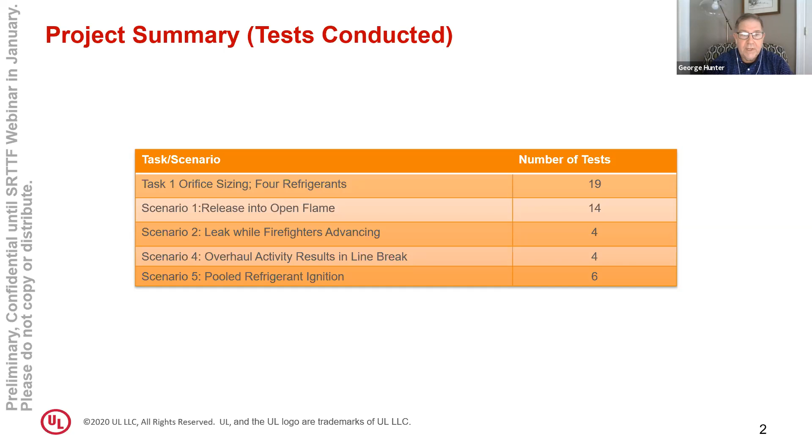What will happen? I'll go through this quickly. What we wanted to do was have a 50 grams per second release rate. We tried 2 methods. One was what we called constant pressure, where we had a refrigerant tank filled almost 80%, so that as we're discharging, it's all liquid.

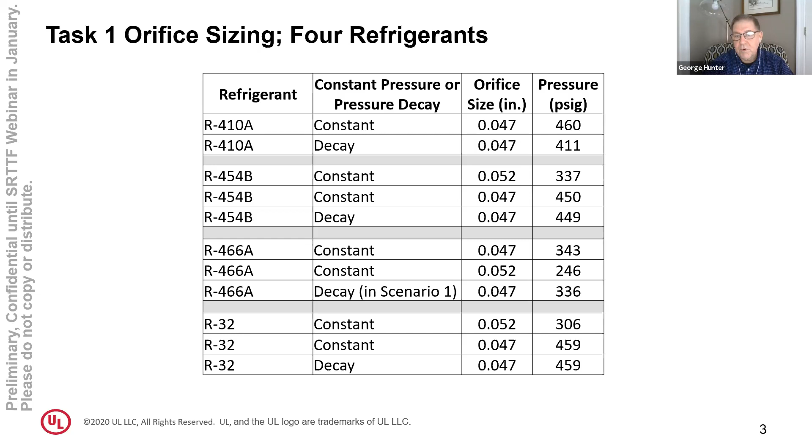The ones we call decay, we filled in either 15, 16, 20 pounds, such that about a minute and a half to 2 minutes into that release, it transitions into 2-phase flow - so you have both vapor and liquid coming out of the orifice. We determined orifice sizes and pressure ranges needed to achieve that initial 50 grams per second.

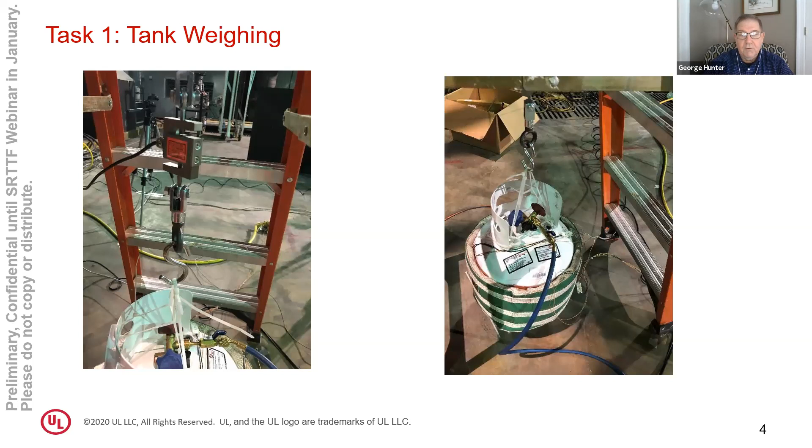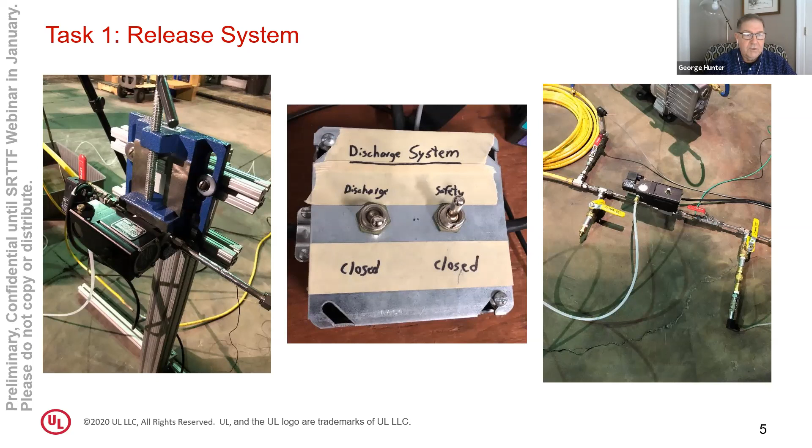This switch that you see in the center is in a control room so that our operators were isolated from any potential adverse effects of being in the test room.

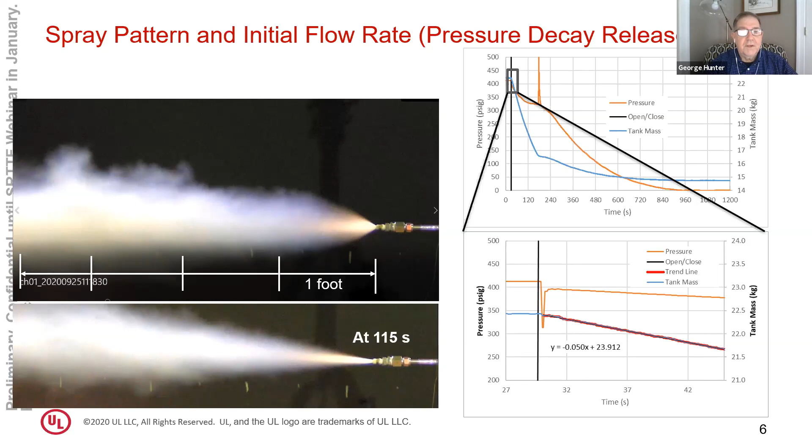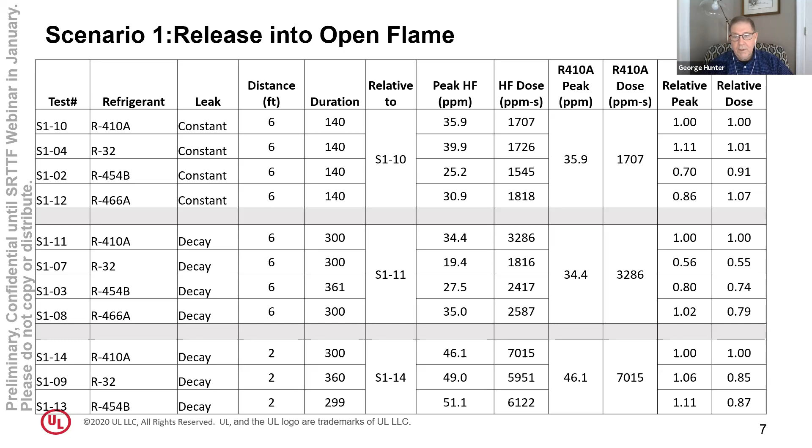But then the last 2 columns take a look at what is that peak of A2Ls, which is R32 and R454B. In some cases they're lower, slightly higher. As far as the relative dose, which really should be the average across the entire 140-second discharge, they're very close - there's not much difference in the concentration of hydrogen fluoride. The same pattern is true at the decay rate at 6 feet, and also the decay rate at 2 feet distance.

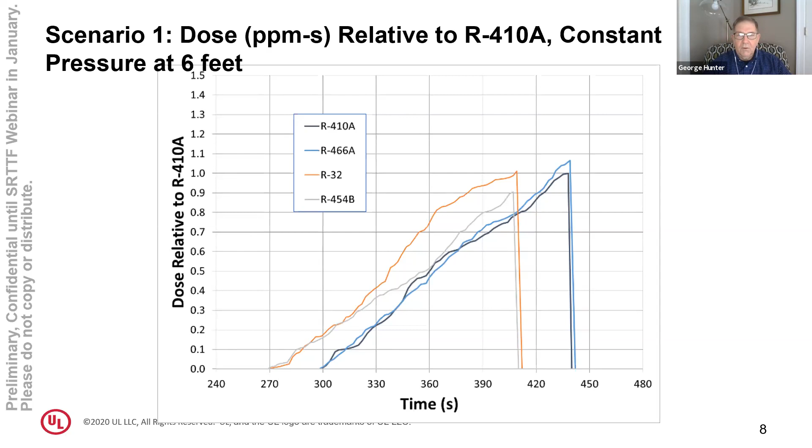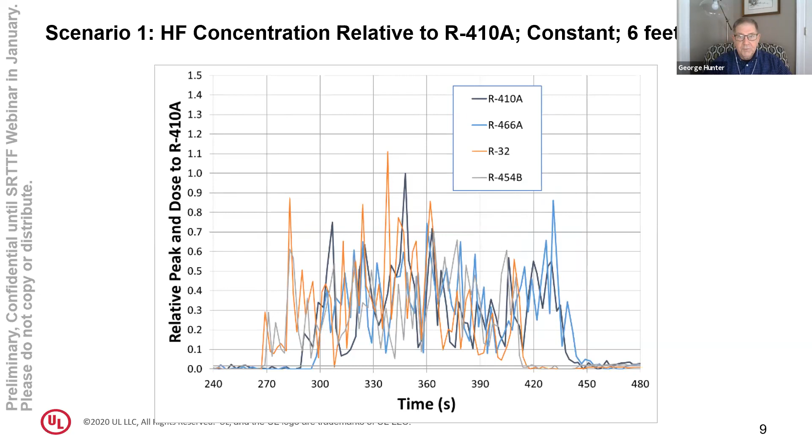We're also measuring heat release while this test is going on. We did not see that this was acting as an extinguishing agent. There was actually a slight increase in the 120 kilowatt fire, not significant, but it was there. The effect of this is this discharge stream was cool gas.

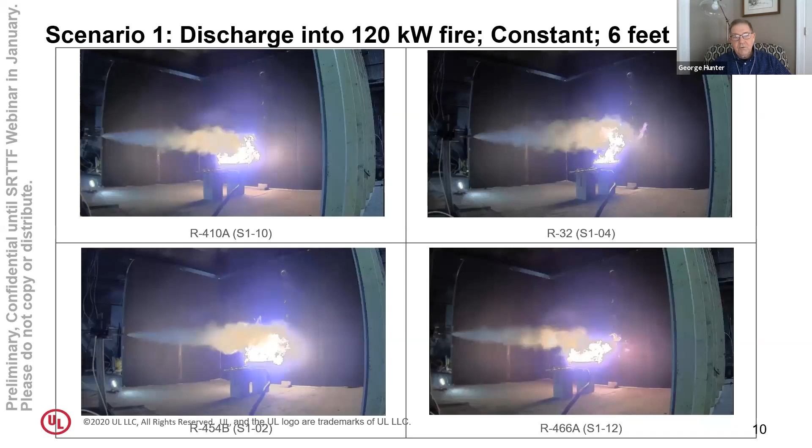Stuff on my screen is getting in the way. So on the lower left is R454B, and on the lower right is R466A. It looks a little different because it's a much denser gas than the other three. But in any case, this is the only effects we saw. It tended to knock down the visible appearance of the flame, but did not increase the fire size that much.

This is taking a look now at what we did at 2 feet. We were not able to run R466A because our smoke abatement system wasn't able to scrub elemental iodine from our exhaust stack. So if we do additional testing, we're going to have to figure out how to solve the iodine problem, which is a component in R466A.

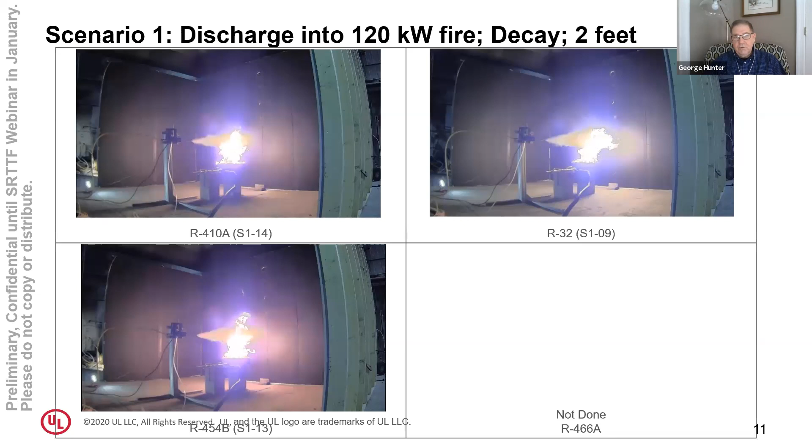But you can see there isn't much difference in behavior. The discharge actually shoots through the flame. It knocks down its visible appearance, but doesn't really change or decrease the heat release rate. It actually does increase a slight amount. So these are some of the observations we have.

There's more being developed as I keep working on the report, but this is preliminary results. The discharge at 6 feet with a pressure decay produced more total hydrogen fluoride than releases at constant pressure. That most likely has to do with that period when the discharge rate drops down to less than 20 grams per second, and there's more dwell time of that discharge in the sand burner fire.

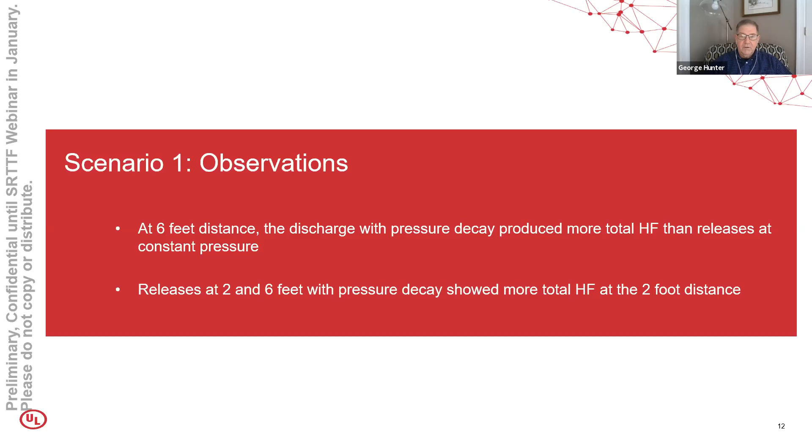Both releases at 2 and 6 feet with pressure decay showed more total hydrogen fluoride generation at the 2-foot distance. So we know there was some combustion, some breakdown of the refrigerants, but it just did not result in a visible flame. It wasn't going to look like a flamethrower.

Our scenario 2 was to look at much more of a situation that firefighters might encounter. There's a fire in a room, there's a hallway leading down to it, and they're about ready to begin their attack. We wanted to look at what conditions they're facing. I'm looking here at peak room center temperatures with the different refrigerants, and a baseline test where we didn't release any refrigerant at all.

The temperatures are all above 800 C. And by the way, the melting point of aluminum is 660 C. I have some photos later on that show we definitely melted aluminum components in the air handler. At the door out of the fire room into the hallway, again, we had temperatures close to 900 C.

In the hallway, there was little mixing with fresh air, so the temperatures were slightly lower, but in the range of 680 to 840. The baseline actually gave us the highest temperature there. The peak at the air handler - we did add some thermocouples to the air handler and attached to the aluminum. You can see that those all exceeded the melting point of aluminum.

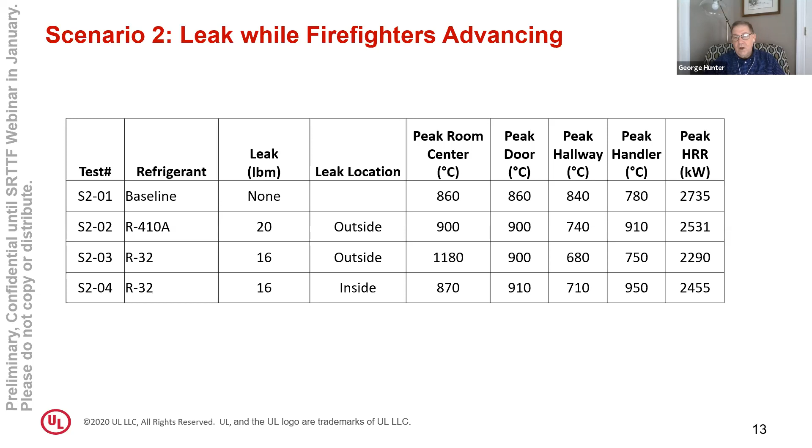Finally is the peak heat release rate in kilowatts. This was more to demonstrate that it was an actual ventilation limited fire. There was plenty of fuel to burn, and in a free burn that we did before we ever started this test series, the same fuel package produced 6,500 kilowatts. So we know that this fire was starved for oxygen, with very little oxygen at the ceiling level.

So this is now looking at a graph of the 4 different fire sizes, shown as a messy graph indicating there's not much difference between the baseline and the 3 refrigerants that we tested. The black line that extends more to the right was our baseline test, and we used that to determine when we actually want to release the refrigerant.

So we started recording and took idle data, or no fire data, for 5 minutes, and then we started the fire and found when it got up to its ventilation limited conditions. We decided that was about 6 or 7 minutes after we started the fire, when it had grown to its maximum size, and that's when we decided to release the refrigerant.

So what we have done is release refrigerant outside the unit with R410A and R32, and inside the unit with R32. We don't see much difference in the heat release rates. That dotted line square is when we actually had the release valve open.

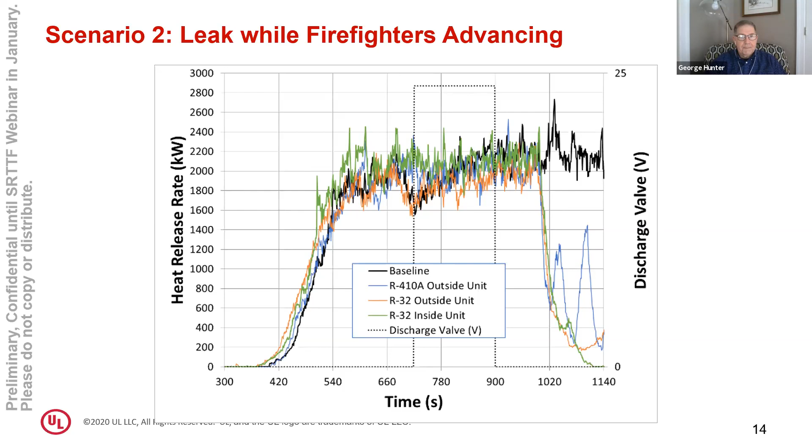So here's a picture of the A coil within the air handler and some locations where we had thermocouples attached, just so we can see what happens with those temperatures.

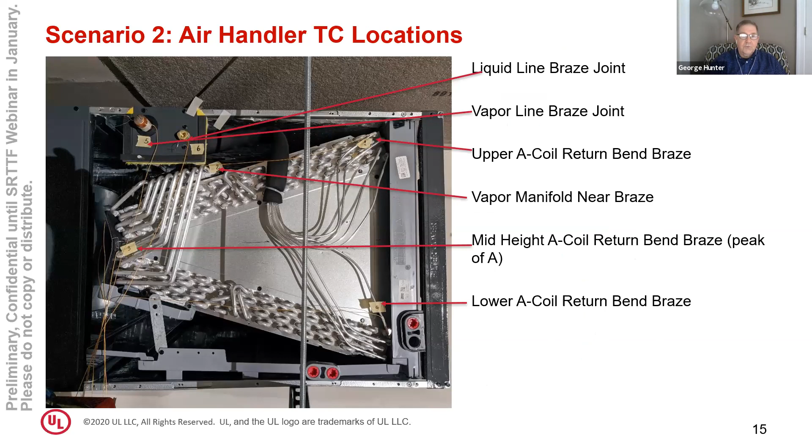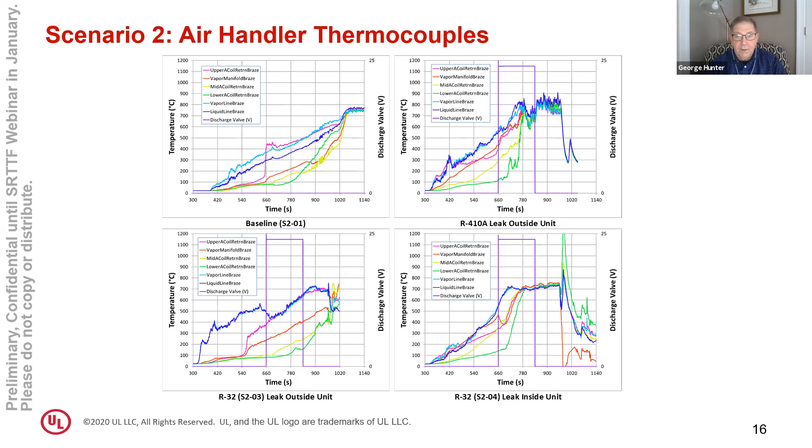In the lower left-hand panel was an R32 discharge, and finally we did a second test with R32, which was inside the unit. And again, we're getting over 700 C.

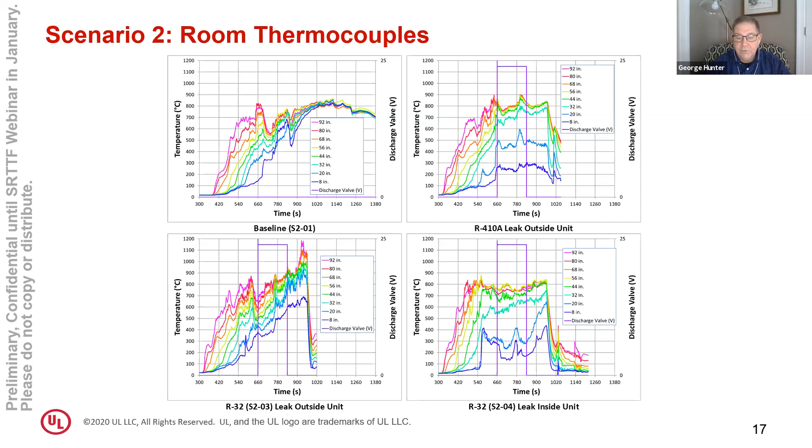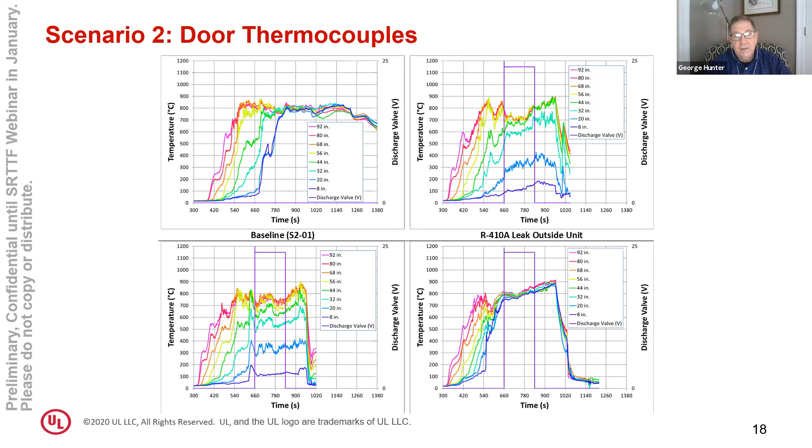The other two, I'm not quite sure why, but it does make sense that with the fresh air coming in low in the room, those would stay cool. It's possible with the upper left and the lower right that we simply had flashover conditions in the room, and it was raising the temperature of everything.

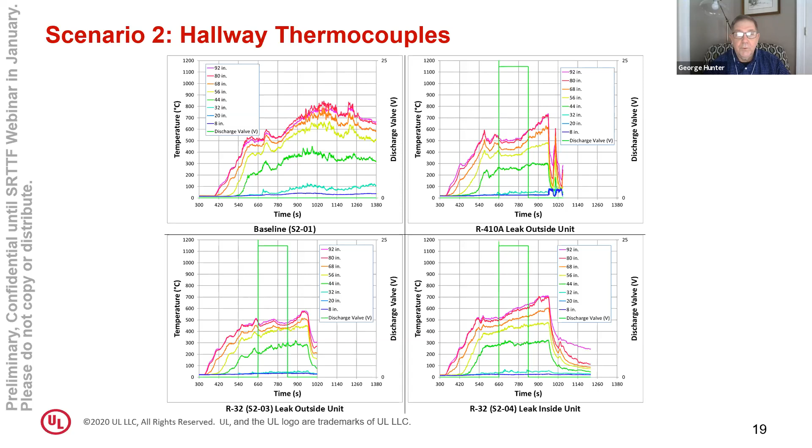The hallway thermocouples were naturally cooler because there's fresh air coming in at the low level, and these lower blue lines show that temperatures stayed pretty low while the hot gases were coming out high. We still had about 300 C at the 44-inch level. Below that, at the 20-inch level, we were less than 100 C, and that was generally the case in all of those tests.

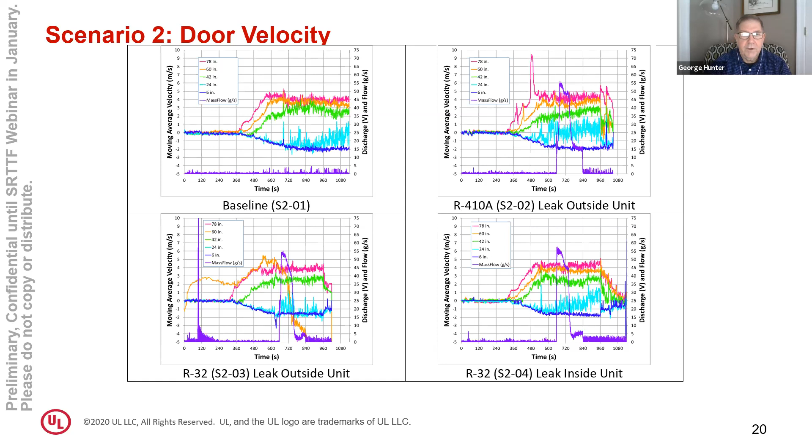We actually measured the door velocity with a set of 5 bidirectional probes and thermocouples. In every case, there's hot gases coming out of the door and cool gases coming in at the lower level. Those probes were at 6 inches above the floor and 24 inches above the floor, so the hot gas layer was somewhere between 24 and 42 inches, probably more like 30 inches in that range.

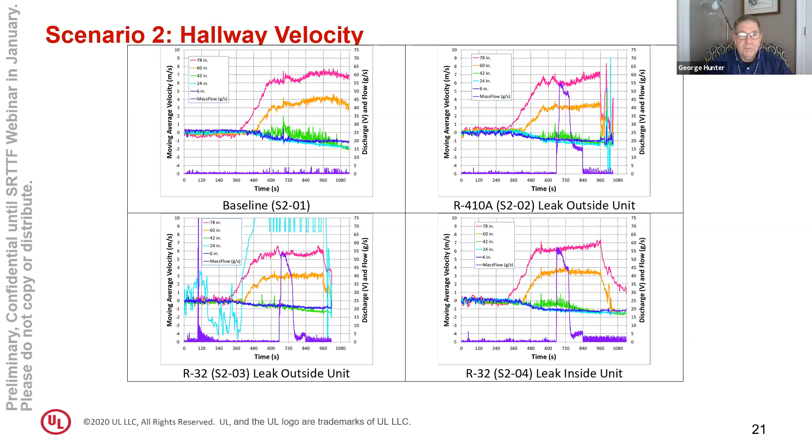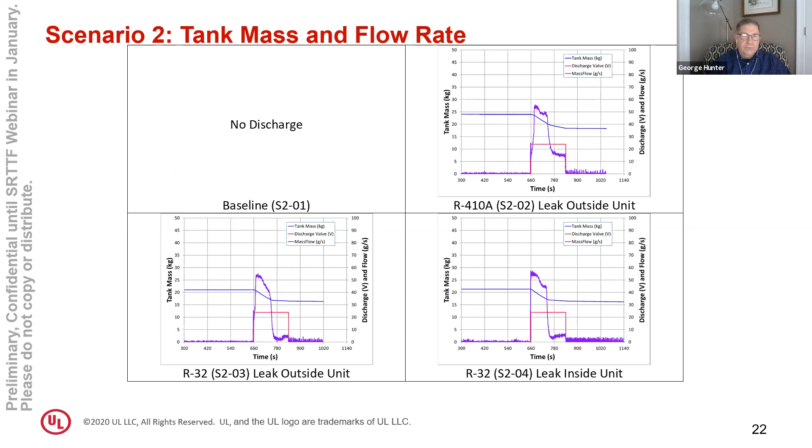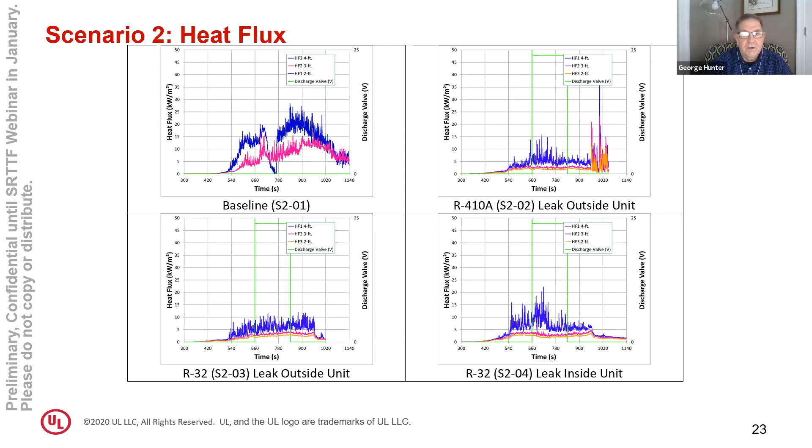And generally, I would say the average is less than about 8 kilowatts per square meter at the 4-foot level in the hallway. So again, we're assuming firefighters are crouched, preparing to attack down that hallway.

So here's some typical photos before the test. Those cardboard boxes are a commodity classification box that we use in sprinkler testing. We have constant heat release characteristics. And so when we burn these in a free burn, we had 6,500 kilowatts.

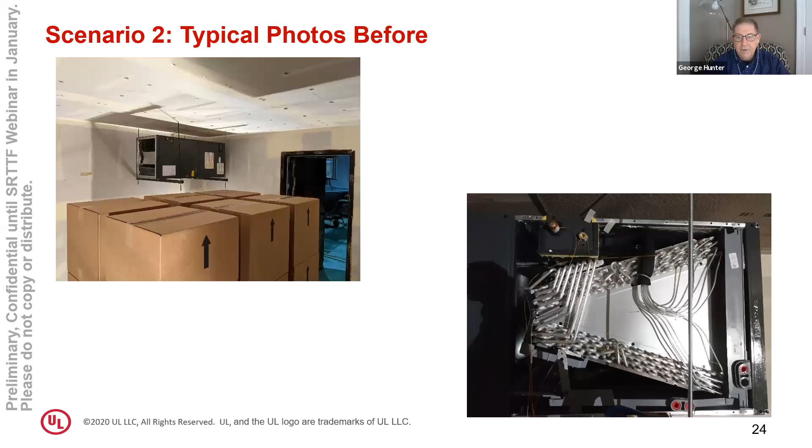Again, there's a picture of the air handler A coil. And here's some pictures after the fire. We supported this unit as a ceiling installation. And you can see that the A coil has translated.

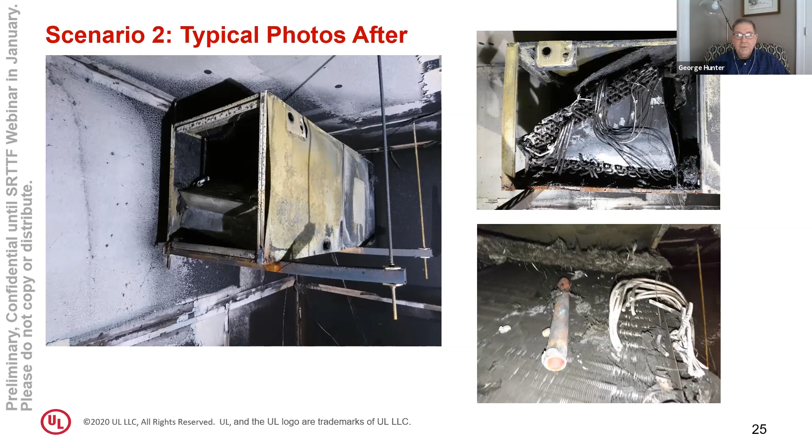The unistrut bars that we use to support it have actually bent from the weight and the temperature in the fire. The lower right-hand corner shows a copper tube that is the vapor return that has completely separated from the aluminum tubes that were feeding into that. So the temperatures were high enough to melt that joint, and there's plenty of damage. Even some of the U-bends on the A coil were melted, in some cases completely gone.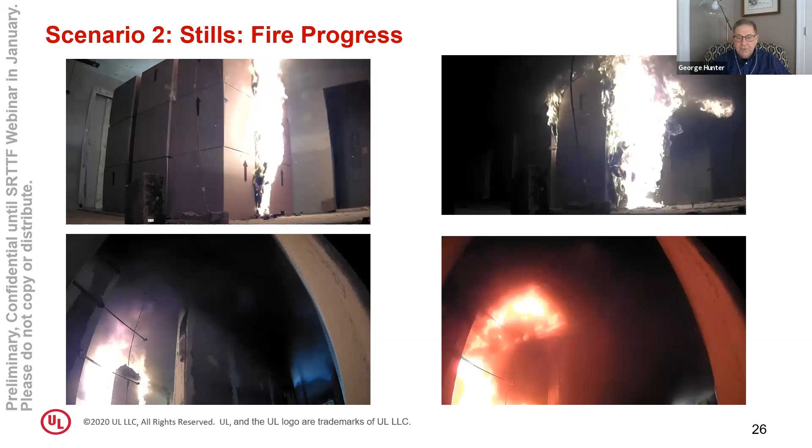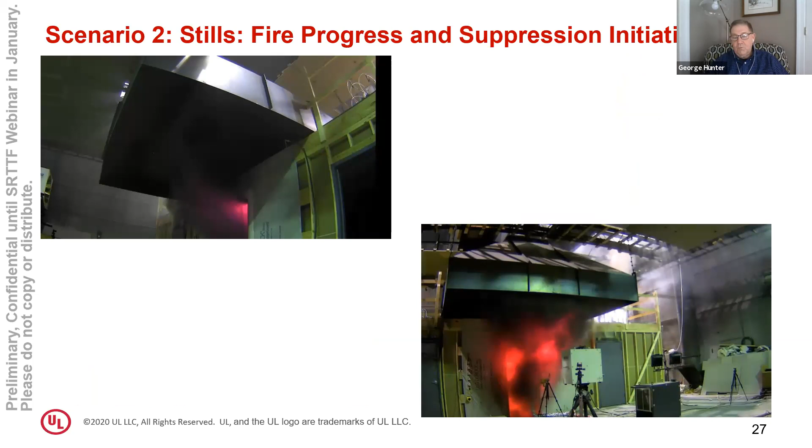As it progresses, it comes out of the hallway and into our collection hood. And finally, this lower right hand is when we actually started a sprinkler in that test room, and it was pushing all of those hot gases down the hallway just due to the flashing of water into steam and pushing everything out of the room.

So we really didn't see any significant difference in heat release or smoke or temperatures based on the leak location. There was no significant difference in the heat release rate. The heat flux was higher in the baseline test than the other three. And then the temperatures at the air handler were sufficient to melt parts of the A coil.

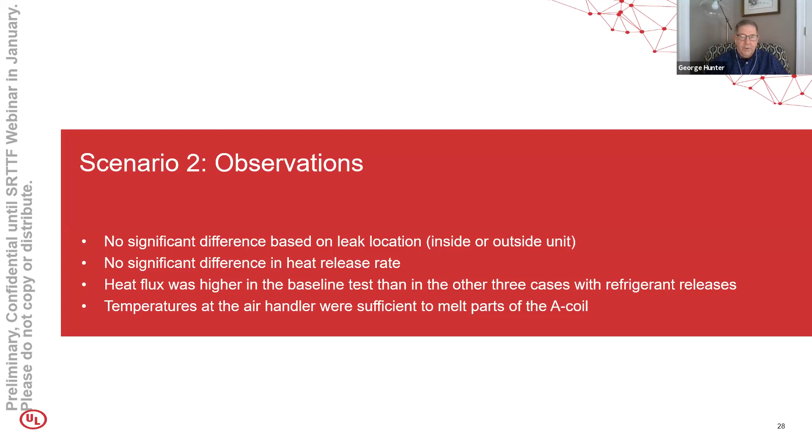So going on to our overhaul activity, scenario 4, we had the first scenario where we were just spraying refrigerant into an existing fire. Probably didn't look anything like an overhaul condition. So in this case, we were trying to simulate a line break in the refrigerant lines that occurs during an overhaul.

So what we have here is we have a 5-foot little wall in the lower left-hand corner here, and that leak location, the little red star, was pointed down to the corner of that area where it would bounce and cycle around to a sand burner that we had operating at 40 kilowatts. And then there was a 1-foot gap in that for the gases to come out.

We also had right outside of that gap, we had a measurement of heat flux. And in other places, we were looking for any indications of a room pressure rise, a boom or a bang or anything like that. We also were measuring the ventilation flows, and we also collected hydrogen fluoride through a solvent method where we're sipping the air that's coming out of this and then measuring the concentrations and then back calculating that to say what was the average concentration of hydrogen fluoride in the air.

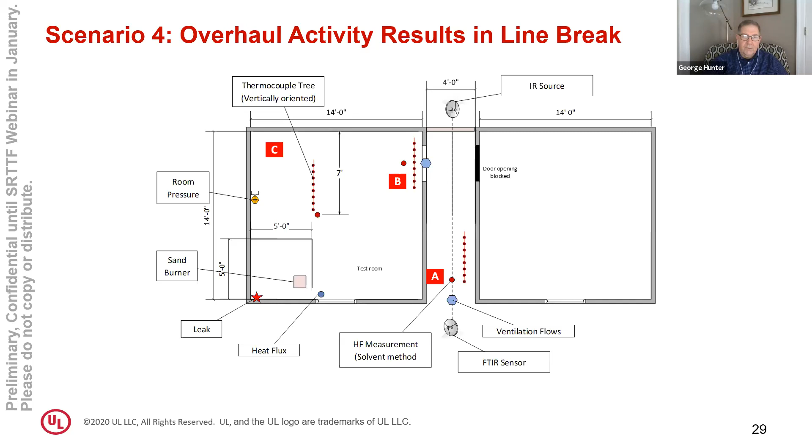So again, I've still got this relative dose, but I need to divide that by the time, which I don't have on here. And anyway, you can see that the peaks for all of these refrigerants in these scenarios was about the same. So it didn't matter whether it was an A1 refrigerant or an A2L. They all had about the same average peak.

And as far as relative averages, in the very last column, you can see that they were all within 2% of what would come from R410A. The peak in R32 was about 18% higher.

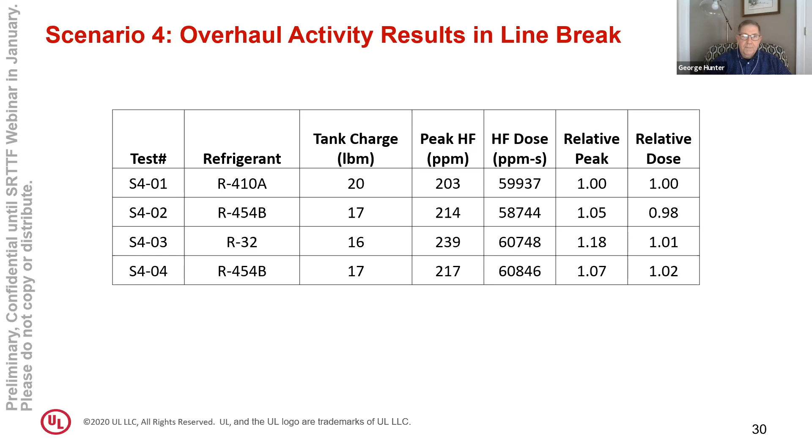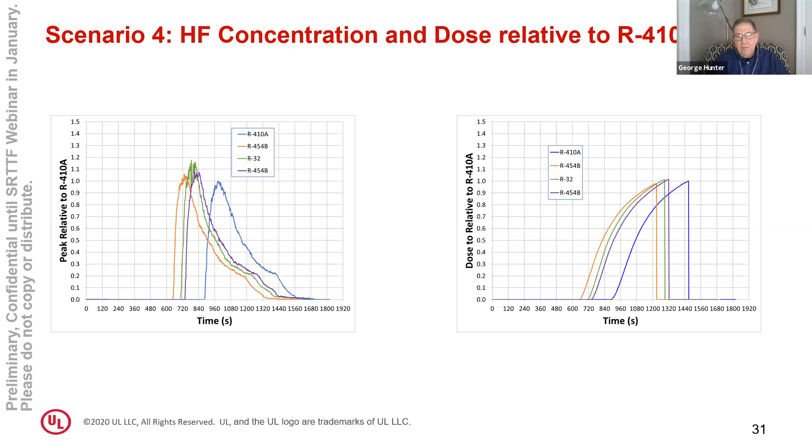So on the left is looking at these relative peaks. In this case, the R410A peaks right at 1, which is the blue line, and the others are slightly higher than that. Again, this average dose shows that they all climbed up to about the same levels as R410A.

And then I'm showing the same thing as far as the mass release. Obviously, the most hydrogen fluoride generation occurred when we were releasing it the fastest at 60 grams per second. But overall, the climb to the overall average was steepest first, but eventually came out to the same level.

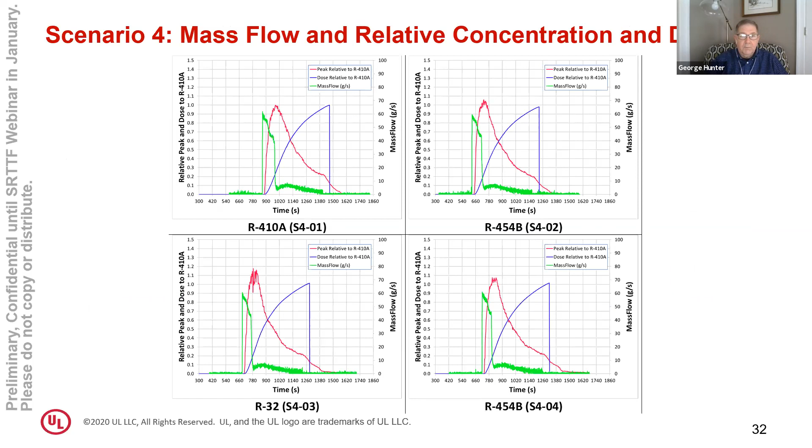We did notice some change in heat release as we were doing the discharge. Again, it was very slight. Our baseline test before we started release was 40 kilowatts, which is at the low end of our calorimeter.

So our relative error at this low end is high, because we're capable of measuring 5,000 kilowatts, and we're talking about 40 kilowatts. So our relative error is around 62%. It's about the best that we can do at this low end of the range.

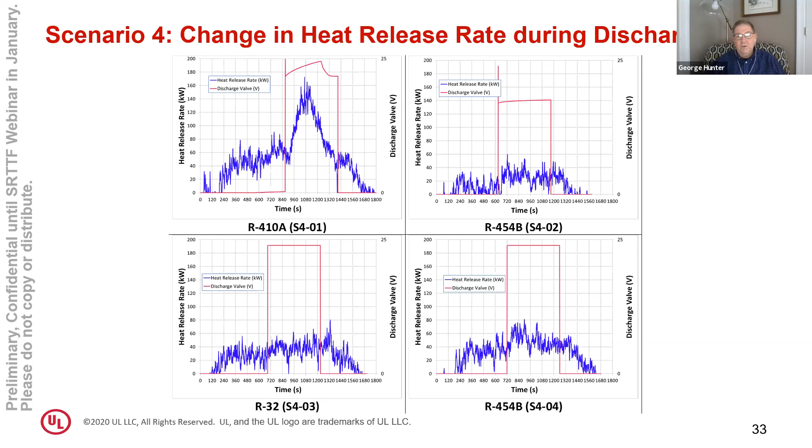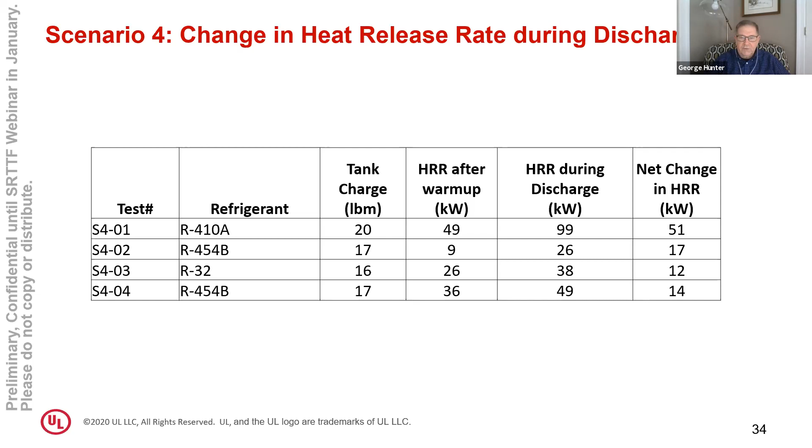As far as the change in heat release rate, that last column shows, if you discount the R410A first row, it was somewhere between 12 and 17 kilowatts additional above the 40 kilowatt fire. A good sized home gas log fireplace is about 25 kilowatts, so we're talking about maybe 2 or 3 sizes of that. It's still a pretty small fire.

Now these are some graphs of what the arrangement looked like. We had heat flux gauges in the upper right hand corner, right outside that opening in this little knee wall. It was 3 feet tall and 5 feet wide, except for the gap on the side where those gases could swirl and exit. In the lower right hand side, you can see those same 3 heat flux gauges right next to the outflow or the gap, so the sand burner is in that same area.

We also had a hydrogen fluoride sample probe in the center of the room, and a thermocouple tree. Going back to the upper right hand side, our discharge port was about 1 foot from the wall at the 4-foot elevation, and it was angled down to impact the corner of this little 5-foot wall, so the intention was to knock off the speed so there'd be greater dwell time in that flame.

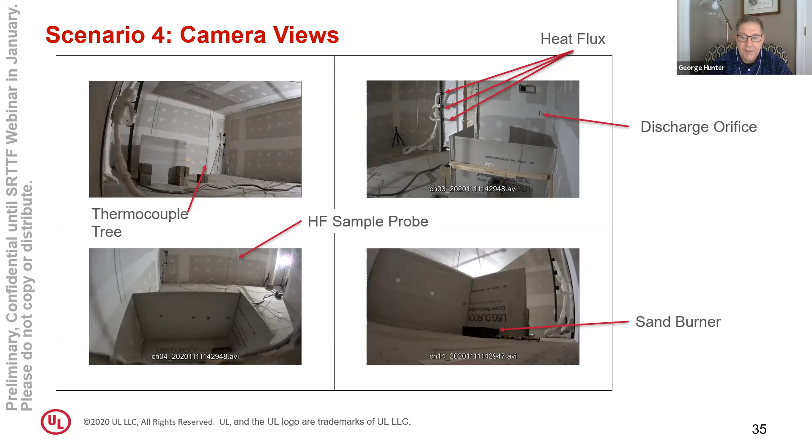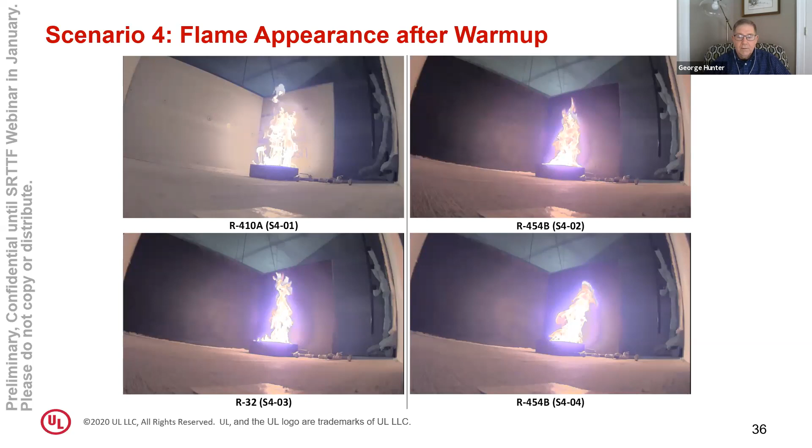Again, this is taking a look at what the flame looked like after we let it percolate for a while. This is 40 kilowatts, it's kind of going straight up. Then after we start the discharge, you can see that the flame is very much disturbed. Not much change in the actual heat release rate, but the visible heat release rate obviously went down.

You'll notice that we changed the background from the white Durock board and painted it black so we could see some of the mist of the refrigerant being discharged. So you see that in the 2 or 3 panels that have a black background.

In the R32 case, lower left hand, even though that looks like it might be some R32, if you see the whole video, it's really just the propane flame being disturbed by this discharge. We didn't see any visible sign that there was any ignition of this refrigerant at the sand burner.

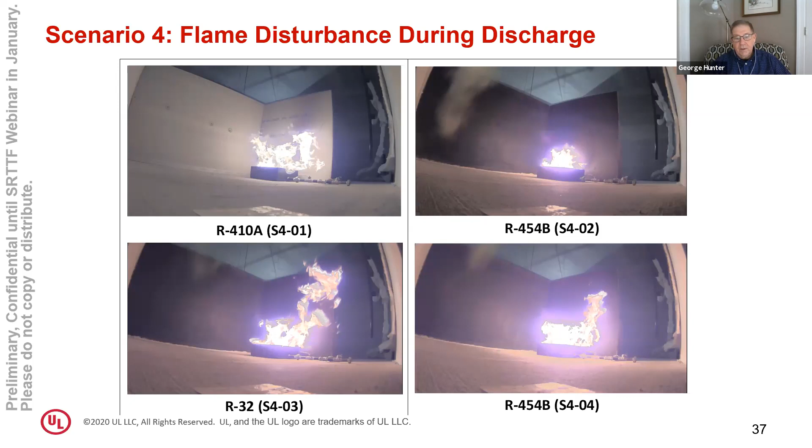So overall, in scenario 4, the production in the hallway was much larger than what we measured in scenario 1. But again, they're not really comparable, because in scenario 1, our exhaust hood was directly over the fire, so everything that was produced went straight up, where in scenario 4, all the gases had to traverse that hallway.

So they were in the beam of the IR for a much longer period of time, which could itself lead to a higher measure of concentration. We did notice that there was less pushover, I called it, of the burner flame, indicating that we did have a lower velocity of refrigerant through the sand burner. But the change in heat release rate during the discharge was 50 kilowatts maximum, and very likely much lower than that. That was the one exception with R410A.

The heat release rate, and it's a comment that we're operating at the very low end of this calorimeter, but we needed to use this calorimeter because of the scenario 2 test going up to 2,500 kilowatts.

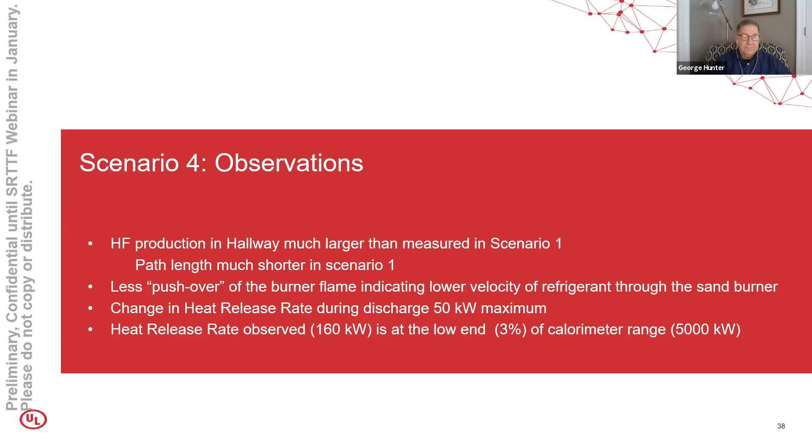The final test that we did is we wanted to look at what happens if we have a pool of refrigerant that's created in the test room. So what we did is we created a diffuser that would knock down the release rate and spread it down low in the room, but then we also blocked half of the height of that hallway door, so that essentially we had a pool for this dense gas to accumulate in. Actually dense and cool, because it comes out around minus 50.

Again, we were looking for room pressure. We also were measuring heat flux. To measure concentration, we're using oxygen sensors right next to it, and also next to the door, because we wanted to make sure that we had fairly uniform concentrations after we finished our discharge of refrigerant. We had an electric match and a heptane cup, which we first started at 6 inches above the floor.

That didn't work out so well because the gas mixture was way above the UFL for the refrigerant, R32, and there was very little oxygen present, probably less than 11%, so that we couldn't even ignite the heptane. It did smolder, but it would not ignite.

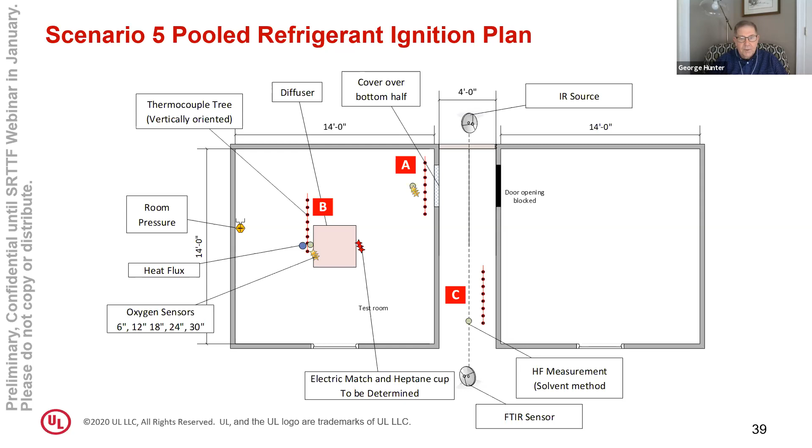So we also had thermocouples, and we had the open path FTIR. So this is a little more about how we did the diffuser.

We took a piece of Durock, 3 feet square, and elevated it 1 inch off the floor with spacers. And then we had an 11-inch hole cut in the center of it. And then we took our sand burner that we had been using to flow propane. This time we decided to flow refrigerant through it and turned it upside down over that hole. So the refrigerant, as in a liquid state, was coming into that sand burner, flashing to vapor, and then dispersing through the room through that small gap at the bottom of that 3-foot square.

We estimated that our discharge velocity was somewhere between maybe a foot to a foot and a half per second, or 0.3 to 0.4 meters per second. So it was pretty slow.

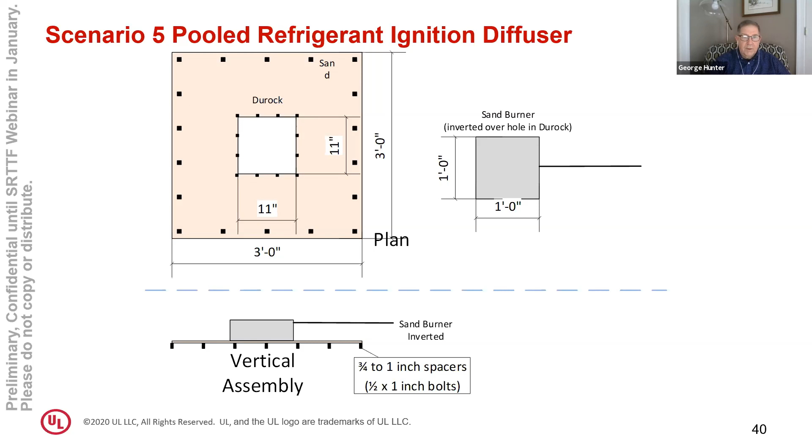And again, this is an overview look at it. You can see that the hallway door is blocked with a piece of drywall. We have our oxygen sensors there and in the center of the room. The diffuser assembly is all there. We also have a stand on the right side.

We have an electric match at the 10-inch level with 30 milliliters of heptane. And at the 2-foot level at that same location, a little plastic cup with 30 milliliters. And then we created our own special candle, which was paper towels and cheesecloth sprayed with a little bit of heptane and then wrapped in plastic just to keep the heptane from evaporating.

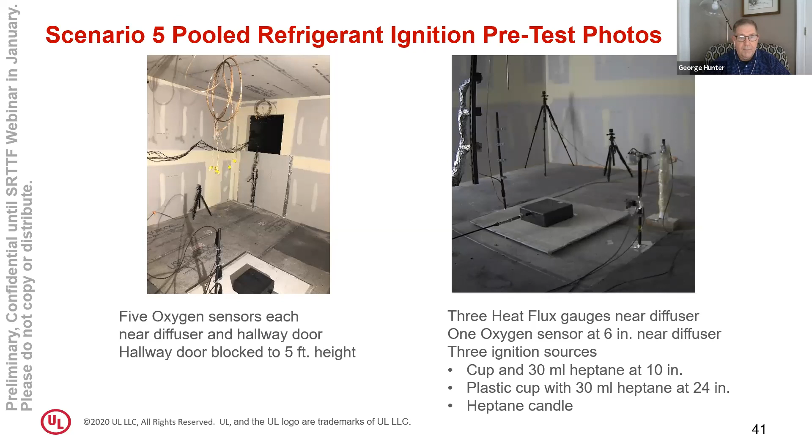So we had cords to actually ignite those matches. We wanted to start with the match at the 10-inch level. So what you're seeing on the left is as we were first assembling the lab, but we did measure concentrations.

So a summary of all the testing we did: one test just to prove that we didn't have any leaks, and we did find that there was a leak, and that was patched so that it wasn't going to be a problem in the next 5 tests.

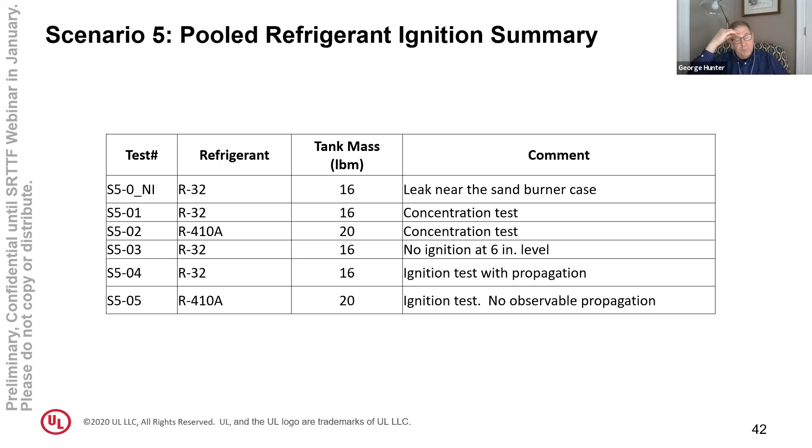So we did a concentration test with R32 and with R410A. And then we tried an ignition test with R32. We're not able to ignite at the 6-inch level. Then another test with R32 where we were able to ignite at the 10-inch level. And then finally another test with R410A. We did not see any observable propagation from that ignition.

So to show you that we have fairly consistent concentrations across the room, the dashed lines are in the center of the room. Or, sorry, I need to make sure I'm reading this graph correctly.

Okay, so I am showing, comparing the first test where we had a leak to the second test with R32 where we did not have that leak. So you can see that dashed line that's above 35% has some squiggles to it, and that was due to the turbulence caused by that leak at the sand burner.

When we repaired that, we went much higher in concentrations at the 6-inch level, way above the UFL, about 29.5% for R32. So we knew we had a very heavy concentration at the floor.

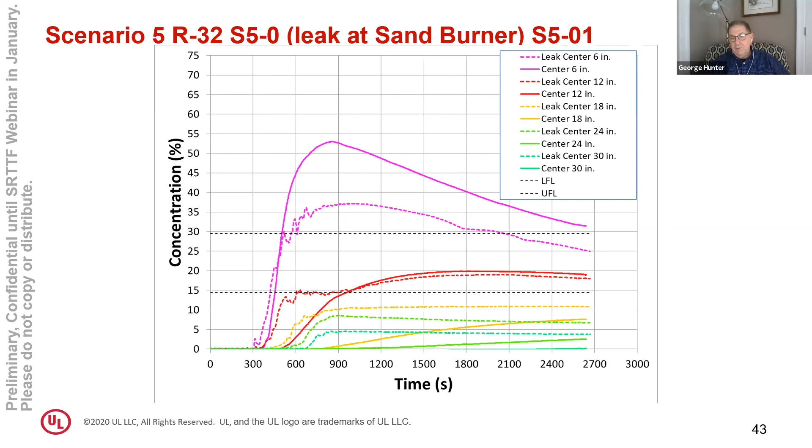And then if you go down one level to 12 inches, you can see that we were right in the middle of the region between the LFL and the UFL. And based on this data, we decided, well, we think we can have an ignition point somewhere between 6 and 12 inches. And that's when we decided to try 6, thinking that the initial flaming of the heptane would go ahead and ignite. But we were proven wrong.

So this is comparing the concentrations of R32 and R410A. Again, we're seeing, and R410A is a nonflammable or an A1 refrigerant, which means it's not flammable when tested at 23 degrees C.

The dotted lines that I have there, about 17 and 20%, come from R410A at 60 degrees C and pretty high humidity. So it's just showing that what we had in the room for R410A really could not be ignited, but there was definitely an ignitable mixture in the room for R32.

So this is comparing the concentrations we had in the center of the room and at the door. You can see those lines nearly fall right on top of each other, so there wasn't any real gradient or change in concentration at the floor level across the room. The floor level was pretty much uniformly above the upper flammability limit.

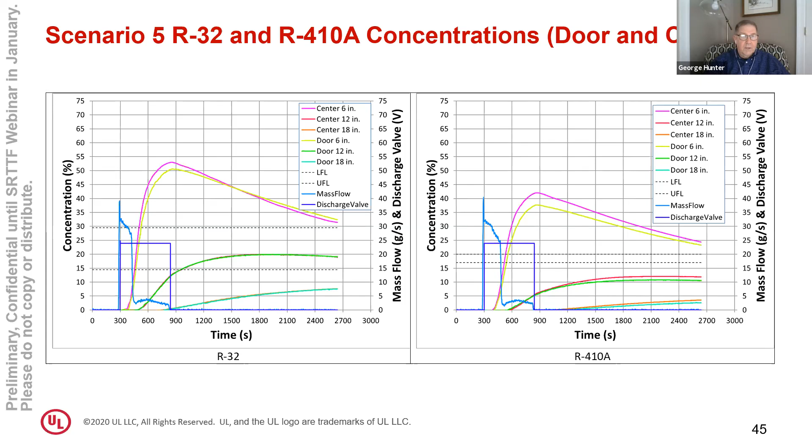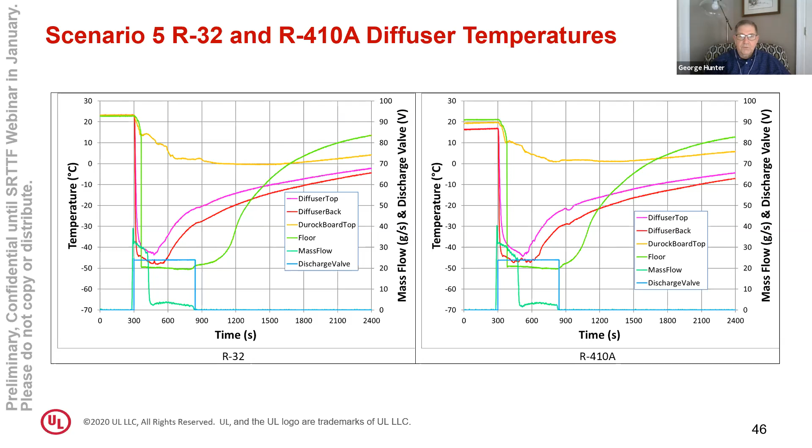Here I'm looking at R32 ignition and non-ignition. We had a slightly lower increase in R32 for the ignition case, which is the one with the immediate drop at 900 seconds. The first two lines that are nearly overlapping each other are the R32 concentrations after we fix the leak. On the right side is R410A, and you see a little bit of a squiggle after 900 seconds, which is the turbulence caused by attempts to ignite the heptane dish.

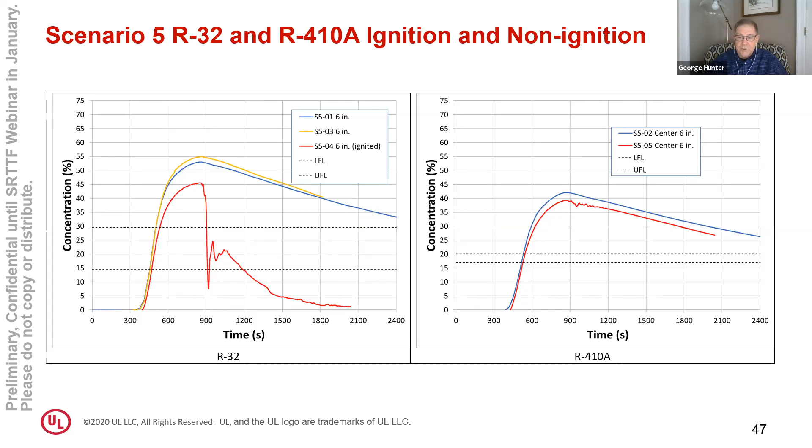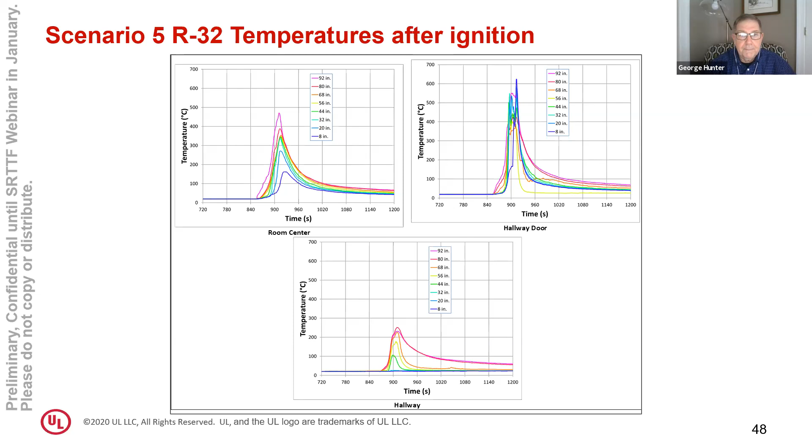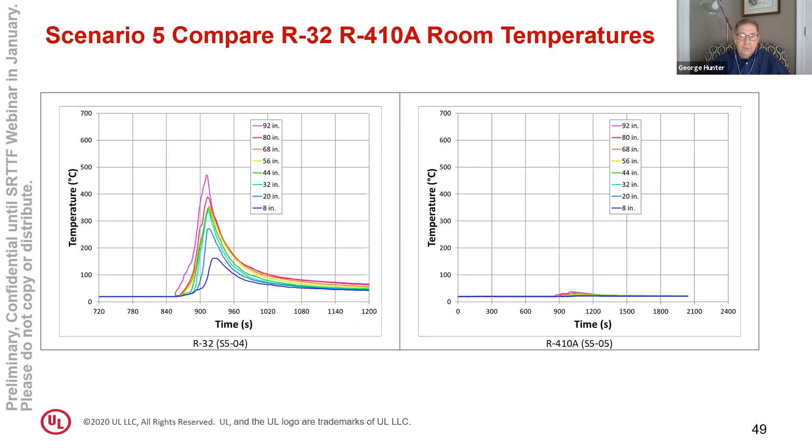Just comparing the room temperatures, R410A and R32, again, we did not have anything like ignition. What temperature-wise we saw probably came from our attempts to ignite our different ignition sources.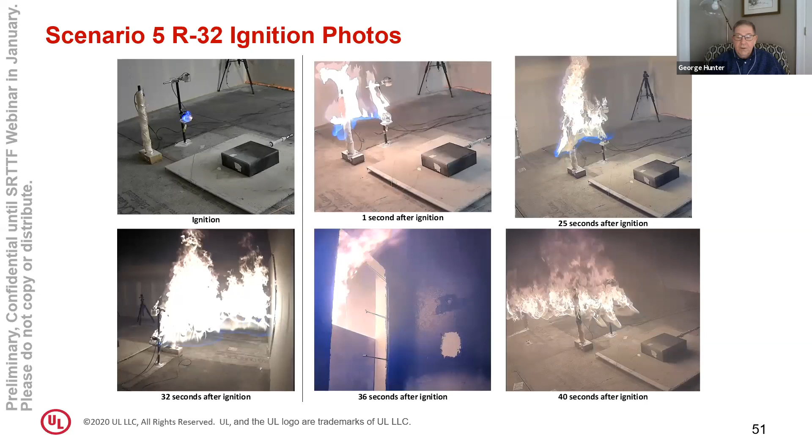In one of the videos, we actually saw that our heptane cup, at about the 25 second mark, stopped flaming because it was pulling up a heavy concentration of R32 and extinguished the heptane, but then turbulent mixing actually forced the flames back down. Hopefully those will all be apparent in the firefighter training videos that are produced.

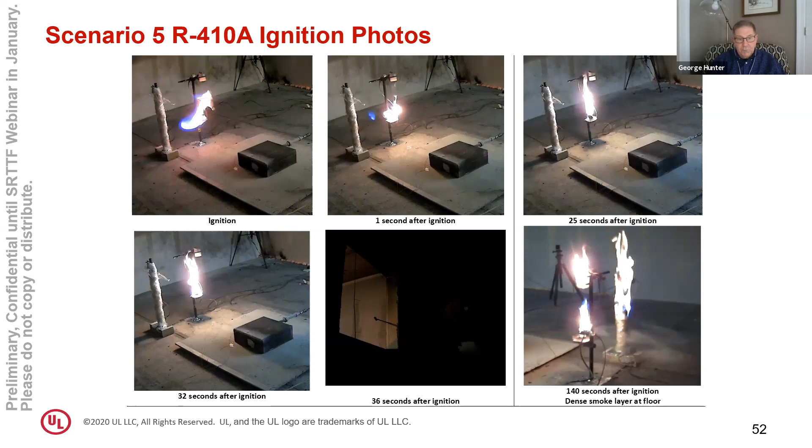I think that was my last slide. Well, some observations. Obviously, the high concentrations at the floor level did not ignite.

The R410A showed a thick layer of smoke spreading horizontally. It was less dense than the R410A at the floor, but it was less than that of air.

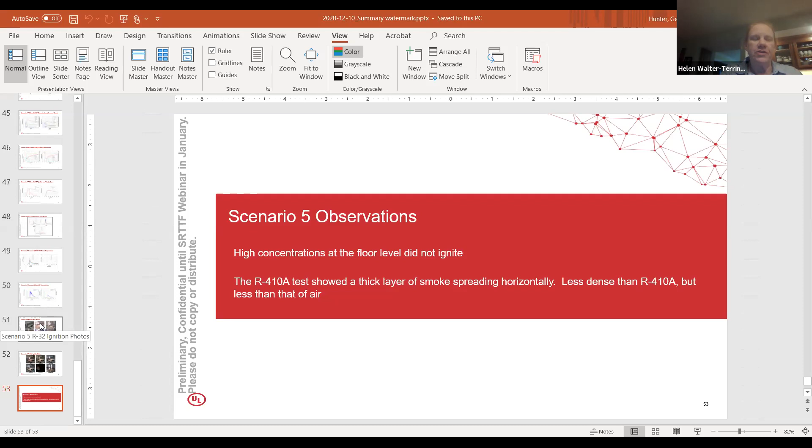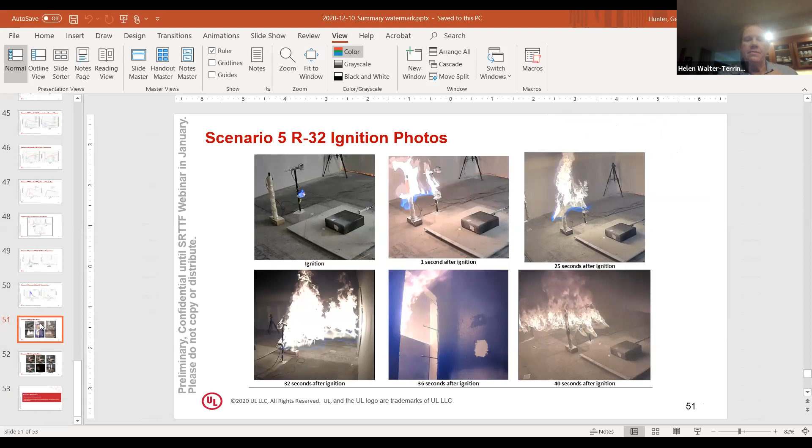So when we first started putting this project together, what quickly became apparent to me is that one of the questions people wanted answered was whether or not these refrigerants would behave like propane. And I think some of those first scenarios pointed to some clarity there very quickly. So I'm wondering if you guys could share your impressions, and then I'm going to ask you to talk a little bit about not only what you saw with the first couple of scenarios, but what you saw that made you feel like we needed to add scenario 5, and then maybe we can talk more about what you saw with scenario 5. So first, maybe you could talk about your impressions, or what you were hoping to see or learn with that initial testing, and then we can go from there.

Thanks, Helen. This is Bill Offerman. When I was asked to join the panel, our concern was that this was going to react similar to propane or natural gas. We were going to have explosions, significant damage to residential and commercial property, and our firefighters were going to be in danger as they entered a structure because of the release of this gas. So the tests were based around a lot of those scenarios. What were we going to come into? How were we going to have to work around the various products being tested right now? And how were they going to react to a flame, an ignition source?

So I think that we covered the majority of those bases. If you want to talk about those in just a minute, Helen, I'll defer to Dick for a moment, and then we'll continue through. Sure.